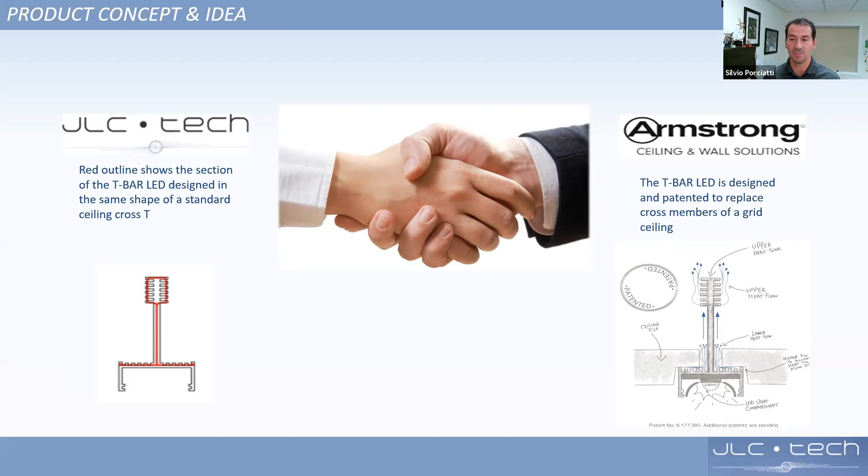So I decided to partner with a ceiling company, very well known, Armstrong Ceiling, a very well known ceiling company in North America, but actually internationally. I showed them my idea, and together we fine-tuned the development of this product. We actually seismically tested it with their grid ceiling systems, and we certified the only product in the world that is certified and tested to be part of the ceiling assembly, and we still have that today.

Of course, I'm going to introduce you to product solutions. Again, TBar LED was developed around this concept to be a cross T, 2 foot and 4 foot, 5 foot cross T's of the ceiling assembly.

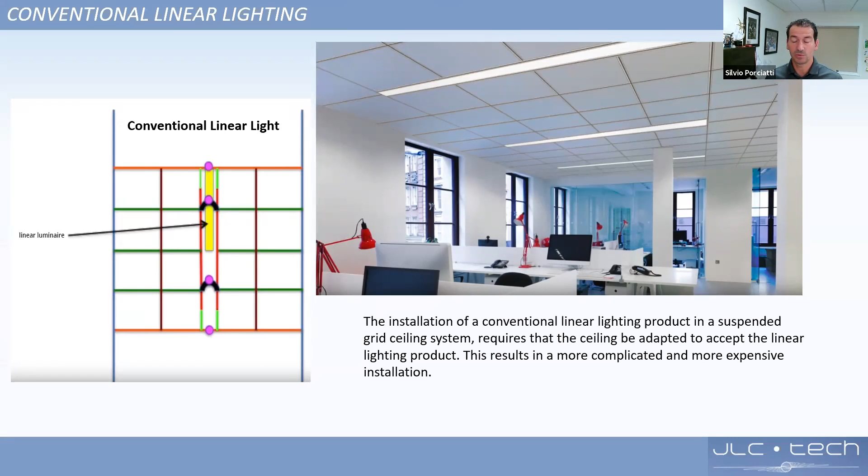Just to make sure you understand the innovation around this, I want to take you to how a conventional linear lighting product will be installed in a grid ceiling system. As you see in this image on the left, the ceiling contractor has to create a slot into the ceiling. So normally, when you have a typical linear downlight, the ceiling contractor will have to create the ceiling, build it accordingly to accept the linear lighting product. Then sometimes, depending on the length, they have to put these U-shaped brackets to hold everything together. So there is a lot of labor from a ceiling contractor point of view to actually put a linear lighting product into a grid ceiling.

Next slide will show you, with our product, we basically have this product that integrates with the ceiling. We offer 2 mounting systems. One is the Armstrong compatible clip, which is basically the same as the Armstrong clip-on system, so they snap into the ceiling very easily. You don't need any tools, you don't need anything. On the other hand, we have a universal compatible clip, which will go with any other type of ceiling.

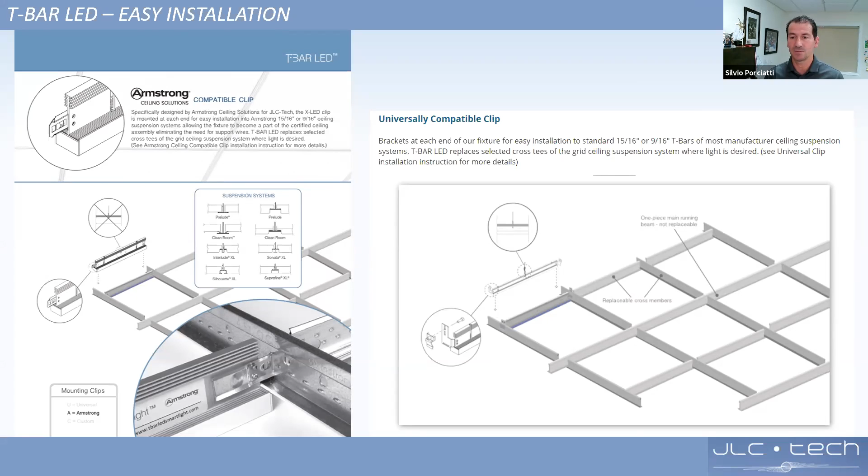Because Armstrong is a very large company, and we love working with them, but we have to recognize that there are other companies out there. So we also designed a universal clip that would still allow you to integrate and replace cross T's with our TBar LED lighted one.

So here you see, going back to the image where you have to build the ceiling, with our TBar LED you basically don't have to do that. We offer 2 foot, 4 foot, other lengths are available as well. We also offer what we call a 4L fixture, which is the purple one that allowed you to do corners of light, because it's basically a 4 foot light with a 2 foot of light integrated in it, so it allowed you to do those corners of light.

And this is all basically, ceiling contractors don't have to do anything different. Imagine they are building up the ceiling with cross T's, and they have light fixtures already installed, because from a ceiling contractor point of view, this is the exact same process of building the ceiling. So no customization, no adaptation of the ceiling.

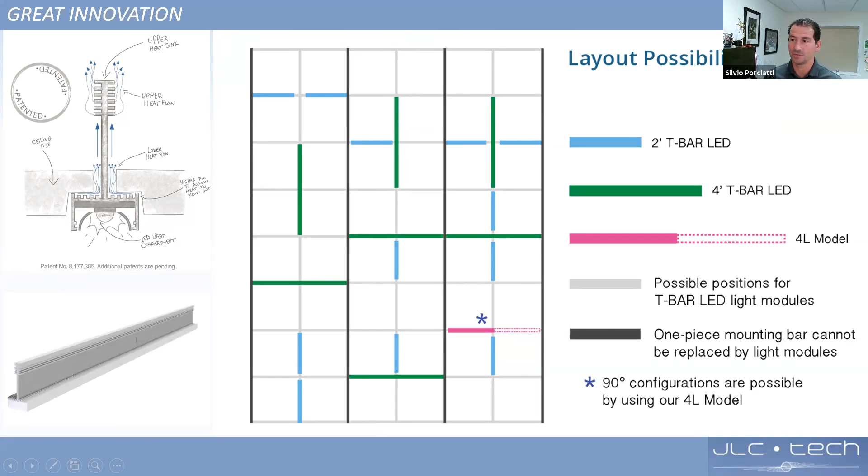Of course, many benefits of doing this. Imagine, for example, no plenum occupancy, meaning that our light fixture, the TBar LED, only takes the height of the cross T into the ceiling. So you can run air duct, you can run all kinds of utilities in the system, and the light fixture will never be in the middle, will never be in your way when you run other architectural utilities in the system.

So you will have there a cross tee. In any case, might as well have a light fixture that also is a cross tee. And of course, improved ceiling acoustics, more tiles, so you are not taking tiles away to put a light fixture. That means more acoustical performance in your space. So that's another big thing.

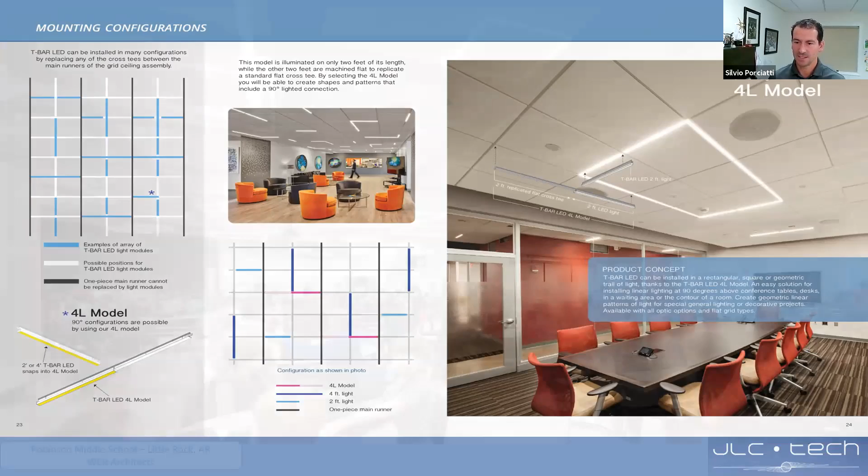This is a beautiful installation we did at a school in Arkansas. We created these squares up on the ceilings using 4Ls and standard 2-foot or 4-foot cross tees. Again, a beautiful installation - the architect was very happy about it.

And of course, we offer a full range of optics for any kind of different model or design that you want for your space. We have a diffusing lens, an asymmetric wall wash, an accent cutoff reflector in two models, a louver we can apply, and also an indirect fixture, the TBar Up, that gives indirect light to the ceiling. We have two aesthetic acrylic block diffusers - one clear, one block frosted. So we really cover a wide range of options as far as product and so on.

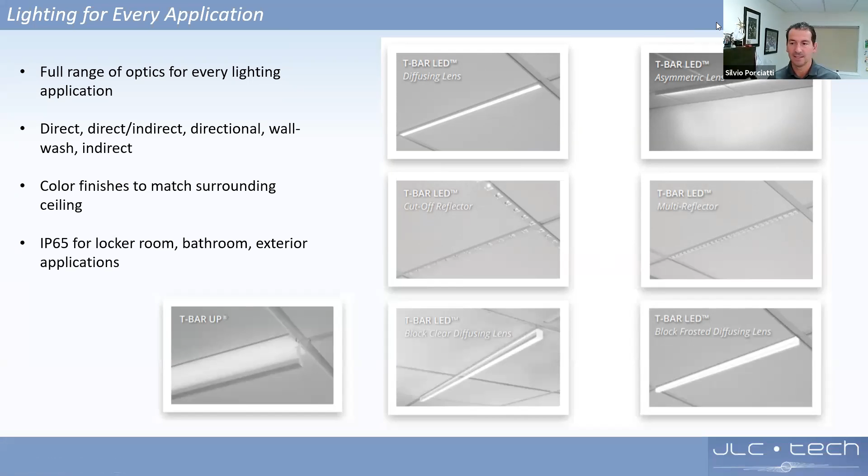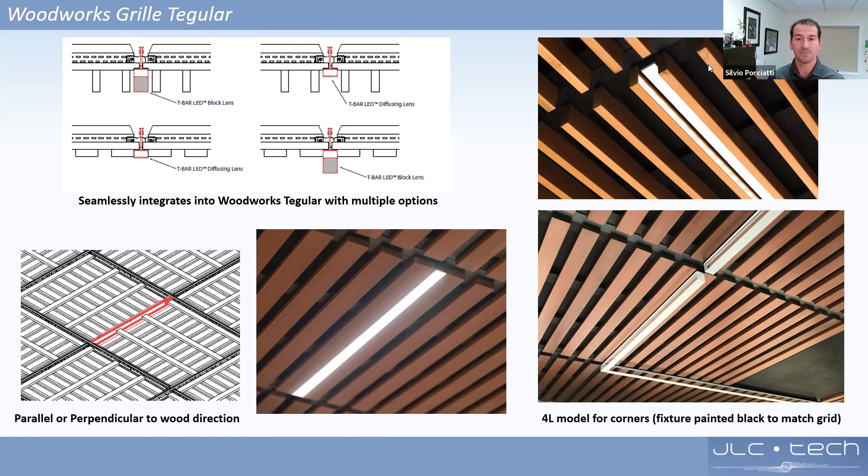Of course, acoustical ceilings aren't just plain white tiles—tiles come in many different options from the ceiling companies. You can choose, for example, wood tiles like we're showing here. When you select a wood tile, it's even more important not to have to modify the ceiling to accept a light fixture. Imagine having to field modify the tiles when you have very expensive wood tiles, having to drill a hole just to put in a round downlight—that's a lot of work and could be very expensive. So again, with our product, no modification at all—this is just putting tiles in. Our product just takes the space of the cross T. Very, very good in this one too.

I'll show you some images of that. For example, these are a normal standard grid ceiling system, 2x2, 2x4, but the tiles are vertical wood slat tiles. You see the effect at the end—it doesn't even seem to be a 2x2 or 2x4 grid ceiling system, but it is. The light fixture is recessed inside, and it makes for a very nice installation.

This is another picture showing the same thing—a wood ceiling, but this time horizontal wood slats, with the block lens. So you see we can play around with different features.

Again, same thing—vertical slats, different color of wood. Just to show you a bit more, this is MIT actually, here in Boston.

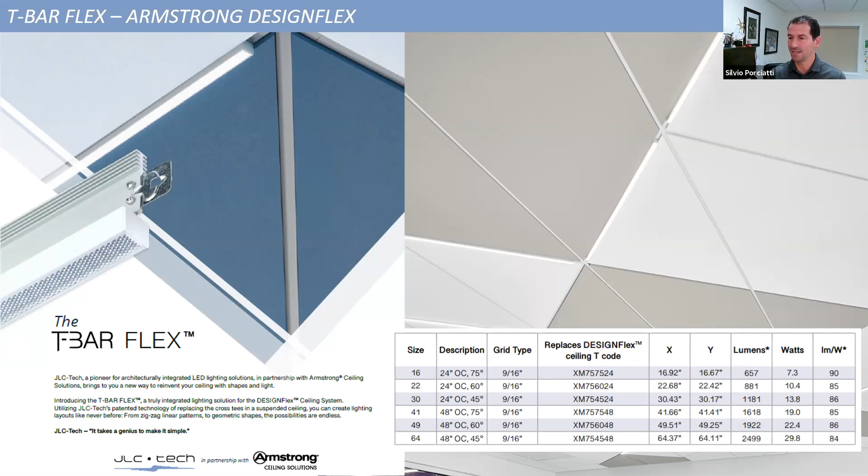Almost any specification that Armstrong receives for this ceiling, the specifier will use our lights, because you can only imagine putting a round down light in a ceiling like this, it doesn't make any sense.

And you see an installation of this type of ceiling, again triangles, tiles, a very expensive ceiling from Armstrong. We basically do the same thing, replace these custom special cross T's with a lighted one.

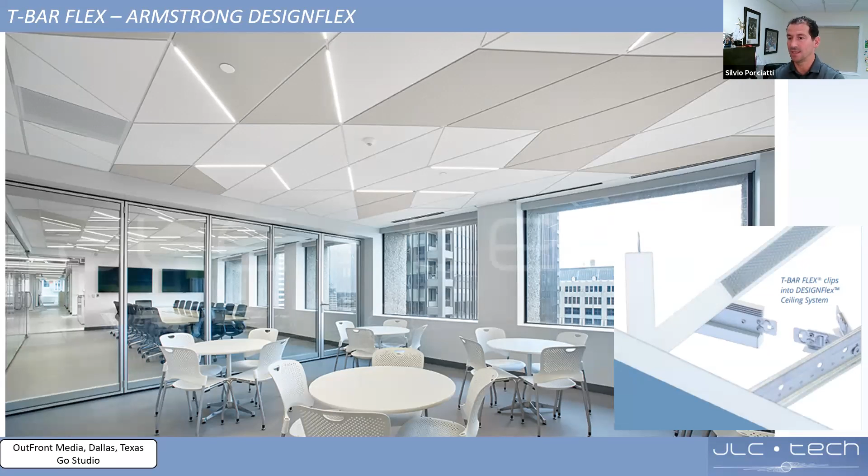Another beautiful conference room. I love this picture, it's very high-end. See how clean and modern it looks. And again, done with the TBar Flex, that's the name of the product.

Technical support. I want to take you through our capabilities. We have internal capabilities where we can support mechanical layouts and lighting layouts. You just bring us the project you want us to work with, and we can walk you through how to lay out the fixture. We can also do light calculation for you, and a lot of other things through our technical support team.

We can do layout reviews, quotations, general mechanical questions, and guide you through the ordering process. For example, we receive a drawing of the space with an RCP, a reflected ceiling plan from you, and then we can draw the main runners and the fixtures, using blue and different colors for different models, 2 foot, 4 foot.

Then you can give this to the ceiling contractor. When he puts the ceiling up, he'll just follow the colors, and it's a straightforward process. We also mark changes if needed, saying move this 4 foot here or there to allow the main runner to go by. We can do this on retrofit too.

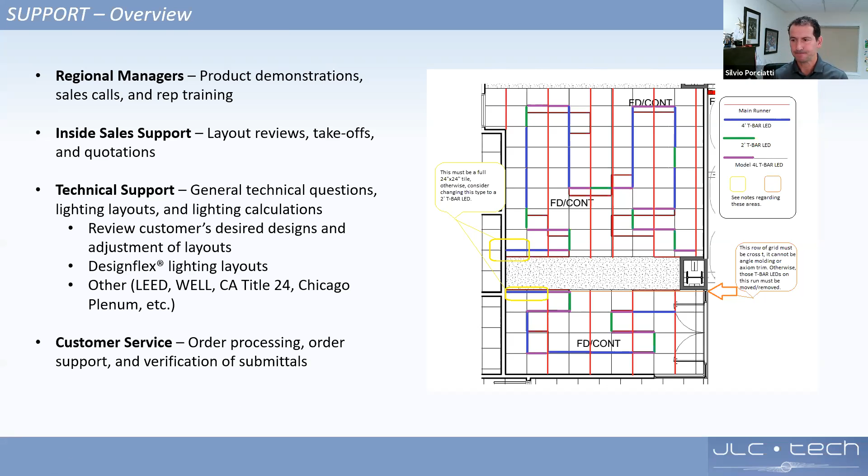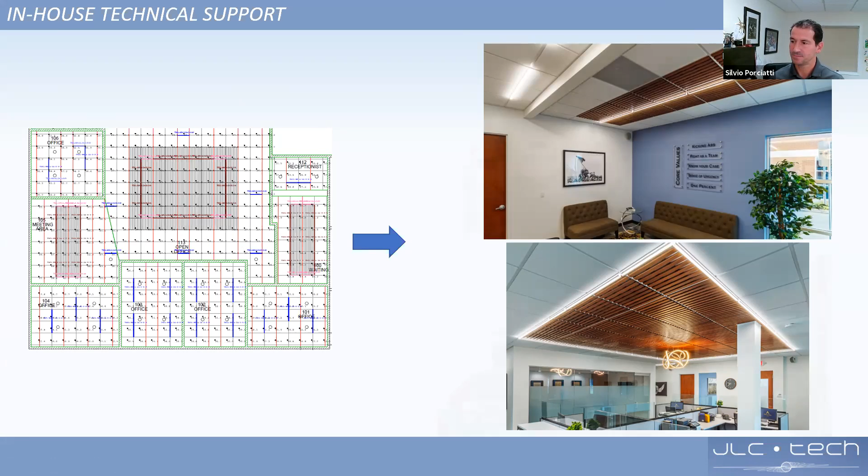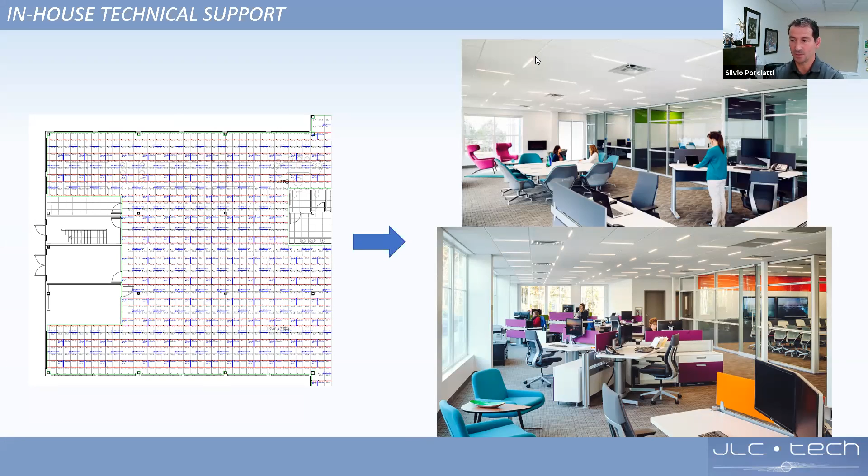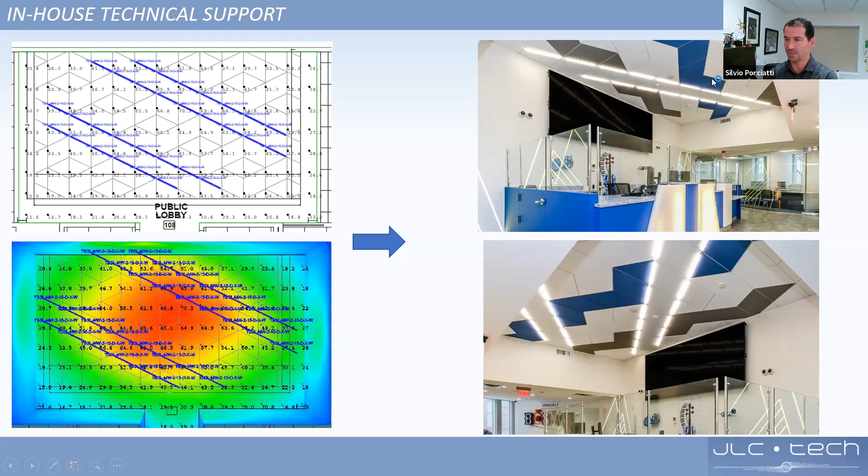We have a series of sales agency networks in North America, but the next slide will show you the international coverage that we have in the Americas. Of course, we have the Caribbean covered by Cesco Limited, and other offices across Central and South America.

We have more range of products. Most of what you have seen is actually part of TBar LED. If you go on our website, you will see each one of them. We created a range of product solutions related to our technology of replacing the cross T with a light fixture. That's our main technology, but we've created a range of products around that. TBar LED is our flagship architectural line that you've seen most in the slides I presented. TBar Flex is also the one with shapes and everything.